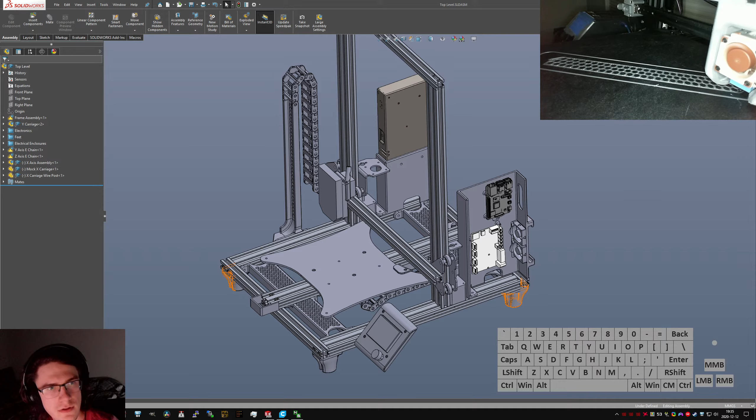Audio. Didn't check any of my levels. None of my levels work. Nope, that's not right. Hey, okay, no wait, we do have audio. All right, music. We got bobbing. My phones are up too much as usual. Okay.

I don't like having 3 bodies in one part, but it's kind of the only way to do it. So let's go back. Yeah, okay. I'm gonna have to control which body I apply these features to when I do it, because these fan features are kind of important. No, I need to go before the fan features so I can do the cutout for the fans, because otherwise it won't work at all.

So this is 5mm. So we're gonna do an extruded boss. Actually, hang on. This guy. Did I just tell it to be 5? I did. Okay, that's nuts. We're gonna do an extruded boss from this face. Then we're gonna take these 2 guys, and my audio is still too loud.

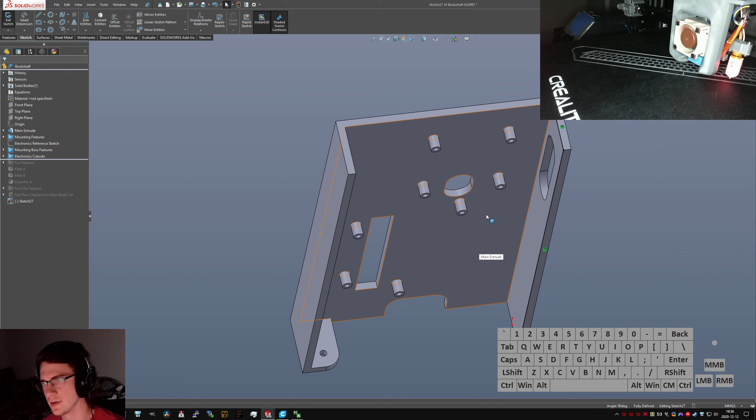So what I'm trying to do here is this sort of L shape back here is going to get extruded into a cover, and I'm going to make some interfacial features so that we've got a snap fit for this whole component that'll just push into place. It'll be a little interesting, I think, making the cutouts for the Pi, but I think one of my control sketches has enough detail there that I can do a rectangular cutout up top here when it's all modeled up. So got that in place.

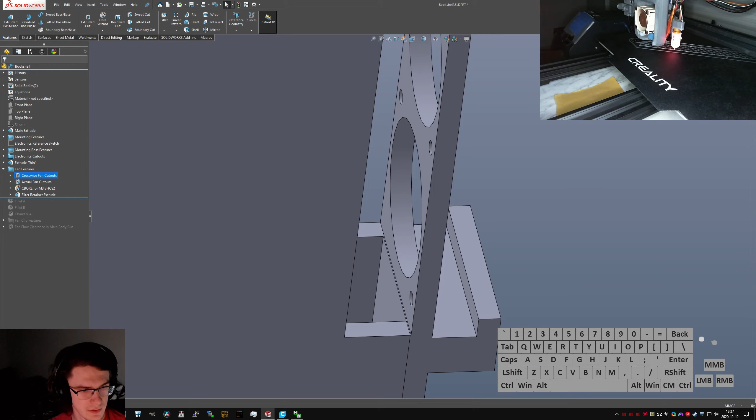Let's do up the body this way. I want 5mm thickness. Nope, it merged. Oops. Don't merge. Looks good to me. So now what I want to see, do the fan features correctly cut that out. Looks like they do not. So we got these crosswise fan cutouts. I'm gonna do through both parts, and that'll get me fan holes everywhere I need them. Which is right and good, I think.

So now I can come back up to here and extrude. Second chamfer on, move around a little bit, and it does work. 2 mils? Yes, okay. Here's a question. I think I do want to do like a 2 mil. Yeah, okay, so I need to come back up to, call this chamfer A. I think I call it the main extrude. I'm going to call it base chamfer A. We can call it base fillet A. Base fillet B.

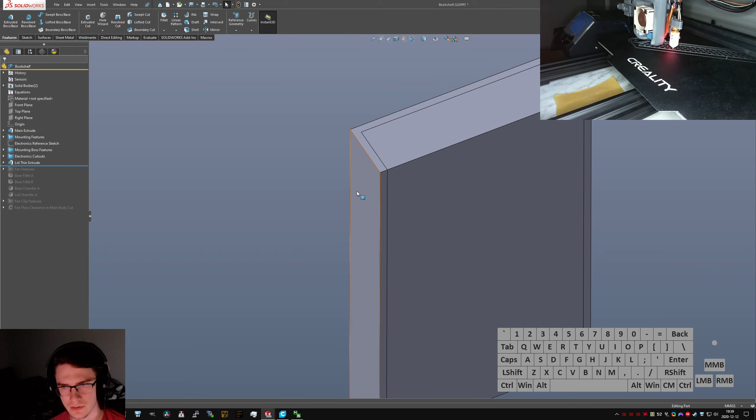And then I think I want this before the fan features. I want to have all my geometry in place up here. Oh, that didn't work. That was supposed to be a hide command. There we go, hide, okay. Oh, wait, I need a move face so I can get some clearance down here. Whoops, not a delete face. Why does it always do that? Deso, can you answer that question? I know you can't, but I can hope that maybe one day you might. Flip direction, pull myself back a little bit.

Question is, do I really want that clearance on all the other faces too? Think so? Yes, I think I want that clearance from all those faces. I gotta be clear on all those faces. So then when I come down here to fan features, now I need to do fillets. I think it's only these upper two corners. No, wait, it's this one down here too. So these will be the fillet A.

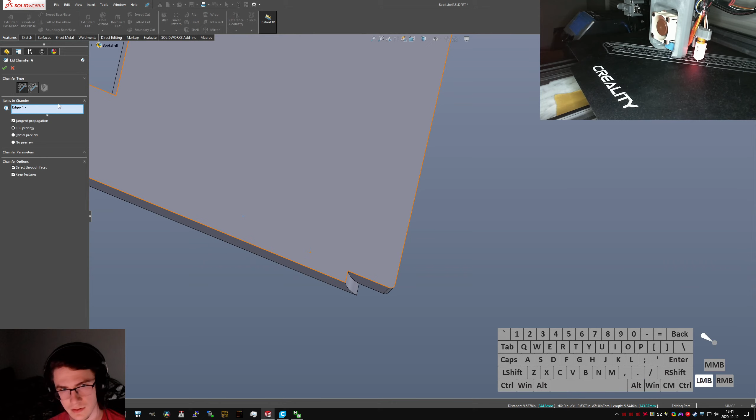And I need an extra bit of lid chamfer here. I don't know why that doesn't work. Not due to geometry conditions? What? It's like 5 mils thick though, that should be fine. Oh, hang on. Oh, that really gets rid of most of that, doesn't it? I think it's still useful to have a chamfer there, so we'll do select tangency in. That looks good, I think. Nice. Yeah, okay, that actually looks good.

This is a little weird. I think having that there is a bit odd, but I want to leave it because it looks good. And that is part of base fillet A, so we can check that in with lid fillet A, because it's all small stuff.

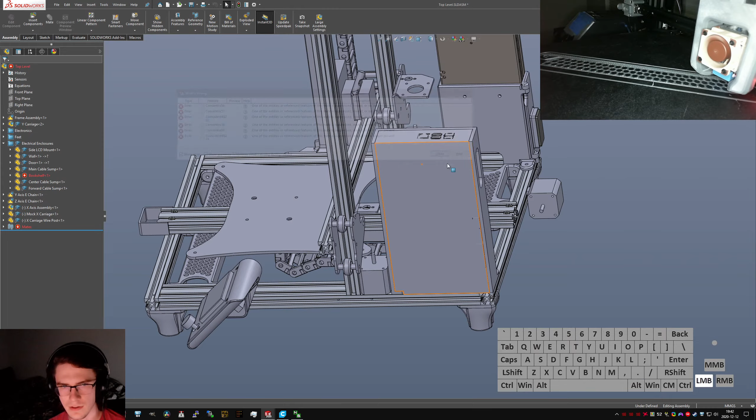Okay. That's the basics sort of knocked out. Call that lid base clearance or something. So now I need to decide, I think, so what I did the last time I had to do this was, nope, that's nothing useful. All my features are exploding, that's great. Made some top level. Oh, hang on, I'm in rollback. Nothing works when you're in rollback, turns out.

Okay, so now we should be missing cutouts up top of the Pi, which it looks like we are. And we've got all that down there that looks nice. That looks kind of janky, but that's fine. And that cutout is oversized. I forgot about that. Do I really want to extend the... Hang on, that was supposed to be pick this body and hide it. That, by the way, is a magnificent little tool for picking which layer you want to hide stuff. You can hide the whole assembly, the part, the body, you can hide the feature, which is weird. I would recommend avoiding that.

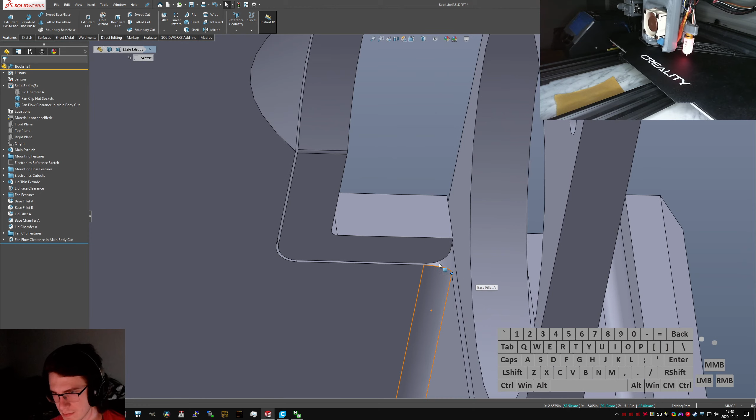Okay, so what I want to know is, we got 5mm clearance on the top, and then probably 2 and a bit. No, 3 and a bit. That's weird. Why did I do that? I'm gonna bump that clearance up a little bit. Let's come down into here. If you pick the face, it'll pick the feature in the feature tree. Or, that's not super useful.

Okay, crosswise fan cutouts. I think we were just a little bit short. How far apart are these guys supposed to be? Oh, it looks like I pretty much just winged it. That's kind of subpar. And I gave myself roughly 2 mils between them. Oh, I bet I did something stupid and made them symmetrical. That's the sort of dumb thing I'd do. Yep, I made them symmetrical.

Okay, so I need 95. So if I come over here and do 95, nothing should explode. It didn't. That's great. Oh, this is a stupid little thing. Fillet options, round corners, makes those look nice and reasonable. It doesn't actually matter because that fillet's so small you'll basically never notice. But why not do it the nice way?

Now the real question: fan clip features. Did I model this as a big chunky extrude? I did. Okay. So that gives me some options. I can stare at this in dismay,

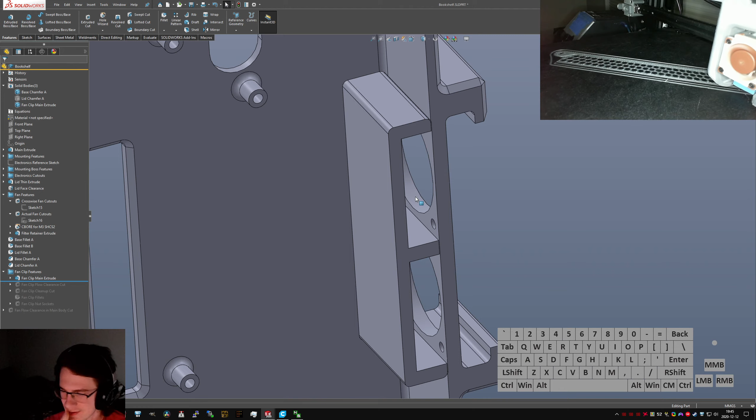which I'm kind of surprised it's not recognizing this as copyrighted music, because I'm pretty sure it is. Oh, I didn't put it in there. I'll just tweak the volume knob a little bit. This is Bobbing. They are one of the two or three musical projects that fell out of Feed Me Jack, which is another excellent band. Oh my god, they're so good. And one of the members became Still Woozy. Nobody will ever watch this. They're great, listen to them.

Okay. Do I want to trim it down to just that? Or do I want to... I think those end up being captive nut holes, right? They don't, actually. Oh, no, there we go. Fan clip nut sockets there at the end. Did I pattern them? No, that's kind of lazy. What I should have done is, if you're more careful, you can have a setup sketch that makes it very easy to pattern things later on. So I think we're going to rethink this cleanup cut.

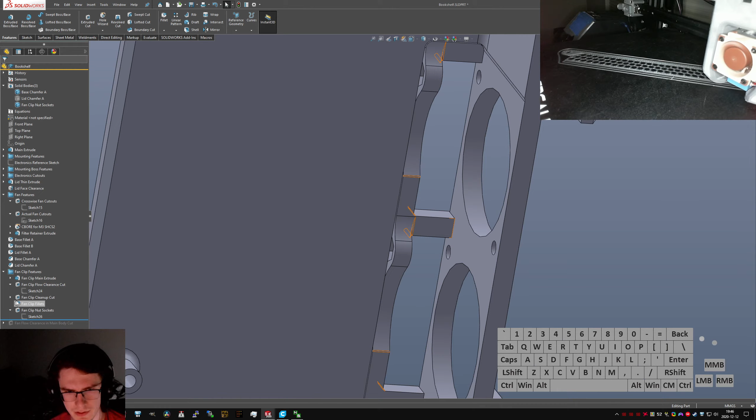It looks like that doesn't end up cutting too slim on the bottom there, so when I come up to this clearance cut and say come from the left edge and then hide my big assembly, then I get to think about how to pattern this. Did I already have the fan holes cut at that point? I did have the fan cutouts. Okay, sick. That makes this a lot easier. This is gonna be kind of wacky. And it looks like there's some fillets on here that I don't remember including.

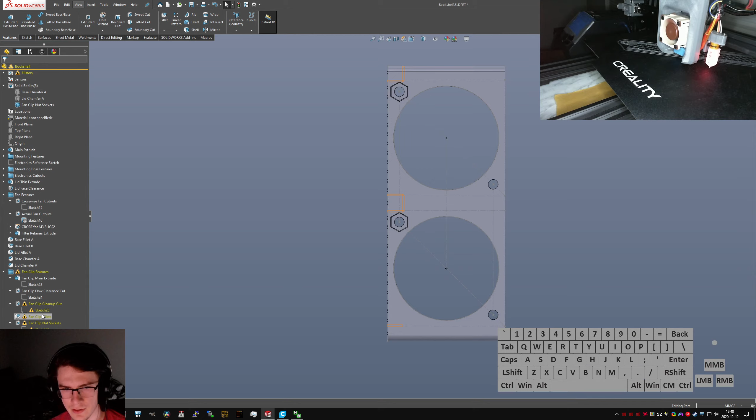Okay, I'm gonna get rid of that line, and rather than relying on that sketch, I'm just gonna draw a whole rectangle around it. And then I can just go to these guys and say, blink. Now they're all the same, they're all good to go, they're all tied to that sketch, and then a whole bunch of stuff down the line breaks.

I think I can actually get rid... Can I get rid of that? Yeah, I think I can get rid of that feature entirely. So that fan clip cleanup cut there should only get rid of the fillets, which is fine. I can fix that. Actually, what if I told it to not delete? I don't want it to delete the sub features, but I don't think I really have a way around that.

It would have been nice to keep where those fillets were going, but now I think it is better to have just the reminder and context for everything. Oh, no, okay, I did have the face offset in there. I couldn't remember when I did the clearance in there.

Okay, we got some stuff that no longer exists. What is it coincident with? I don't know what it's coincident with. That's weird. So let's... I don't know why it's, let's do coincident there. Sick, okay. Make a sketch.

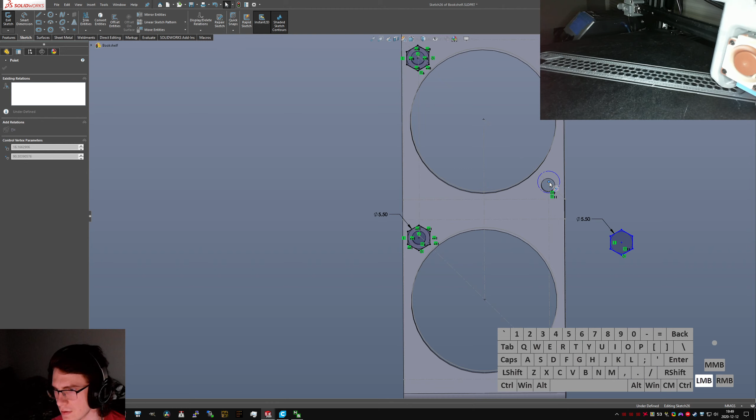And then I'm going to edit sketch, do Control A, Control C, Control V, like a lazy person would. And none of the relations copied. So, pattern driven, is that even a thing? No, you can't do a pattern driven sketch. But it looks like it doesn't really copy any of the relations, which is really rude. It doesn't do me any favors.

So we're gonna go and do the same trick again. Copy all of my circles and hit Q and make them equal. And just pick an edge, orient it the way you like. I'm sure there's a better way to do that programmatically so that they're all linked together. Like maybe you could make one parallel if you wanted to tweak them later, but these ones, I don't want this rotated 60 degrees because then it would put this point towards here, and that's a weakness issue.

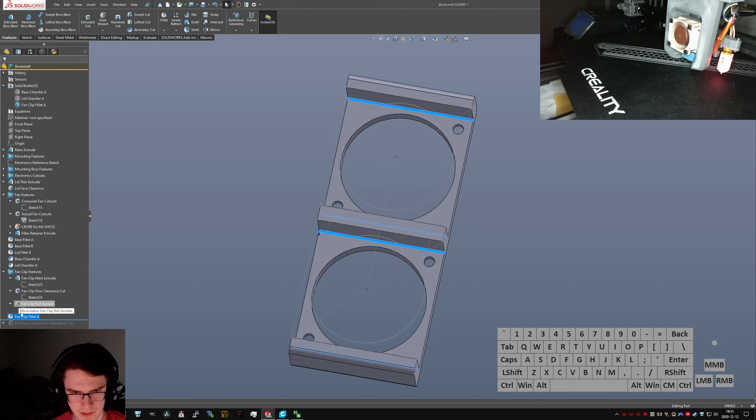So, fillets. Let's do fillets. I'll do fillets last. So, I'm okay with leaving them at the end. I think I had them before the fan clip nut sockets for some reason, but that's not really best practice. So we'll get these concave ones. 0.6 is right. So, fan clip, fillet A. We'll make sure that it's beneath one of these so that when you close the folder up, it disappears all nice and dandy.

So here's the sketch. Get that sketch. Alright. So that looks good now. Let's come back and look at it in context. This thing, I used to hate this dropdown because I thought, why would anyone ever use it? But it turns out it is fantastic for this sort of thing where you're doing multi-body parts and you need to hide things quickly to get a good idea of the context. But that looks good, actually.

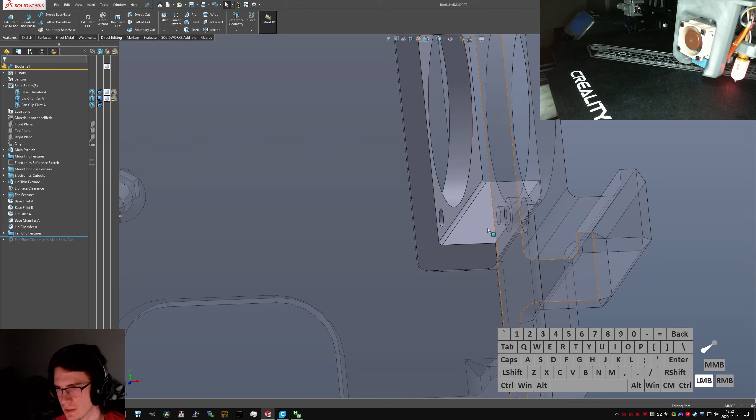I think originally I was planning on just leaving the nut open on the face of the fan there, which is fine, I guess, but it's not great. Whoops. I want to see to that face. We still got 20 millimeters, which is perfect. We're gonna have like no interference issues, I think. Yeah, it's fine. It's fine. I'm just gonna not worry about it and hope it doesn't blow up in my face. So let's turn those off.

Oh, hey, we're on to the next album, it's called Mixtape from Bobbing. Also excellent. Great choice. I think what I'm gonna do is I'm gonna add my Feed Me Jack playlist on the end of this, because it is good.

Did I fillet the inside of that? I did. Okay. That looks a little weird out there, but it's fine. So, fan flow clearance in main body. Yes. Okay. It looks like I'm just stealing off that sketch. And it looks like what it's doing is it hasn't selected the other body. So if I just tack that on there, we should get two nice little cutouts in the side of this lid structure.

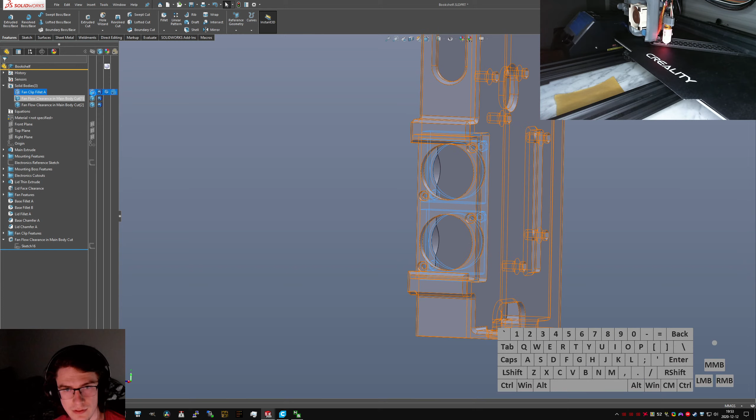I can hide that. Whoops. That hide it? Yes, okay, that does hide it. So we'll hide, yeah, we get two nice little fan flow cutouts. Not really necessary, but a nice touch.

Lid features, various fillets. Seems all right. That's most of the things I wanted for that, I think. And I don't think we're gonna have issues.

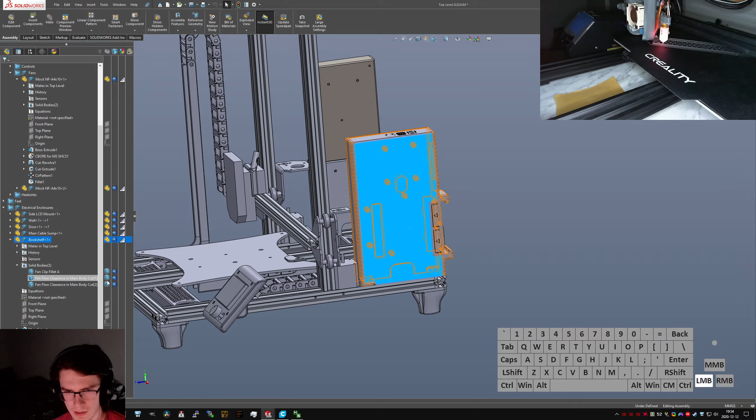Let's come over to the main body here. Hide the mates, those are always rude, kind of hard to deal with. But this guy we can. Oh, we do want to pop that out actually, I do need to pop out bodies. Let's hide lids, or no, wait, yeah. Let's hide the base, and then we can come back here and say that's Garbo. That won't work, or it's fine. That will work.

It's gonna be kind of tight, I think, from the top of the PCB to the inside of the face is about 3/4 of an inch. Is that what that is? 17.4 millimeters in inches, okay, 2/3 of an inch roughly. That's not great.

It looks like we still have a little bit of recess in this. What's the maximum distance here? That's center to center. Oh, hang on, I have these now.

One of the early issues with drawing this part was that I didn't actually have those heat... oh, they're already on my desk. What am I doing? I didn't have those heat sinks that are right there, that'll be cooling the backside of the stepper drivers. Now I do. So, calipers.

A bit of my stream prep work list: remember to grab calipers because you're going to measure stuff a lot.

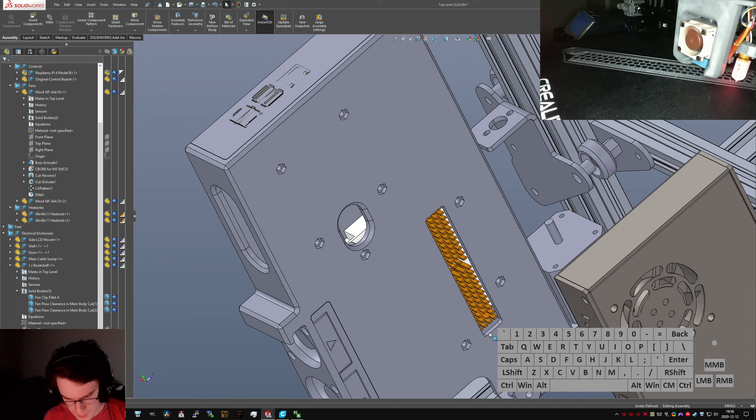Okay, so it looks like, well, let's get a baseline first. What did I think this distance between here and all the stuff that's in my way is going to be? That is 13.65, 4 fins wide. This is about 15 millimeters, so I'm definitely going to want to go narrower, actually. It's 11 millimeters across for this one, so what I'm going to do is come over here.

Oh, hang on, why is this untrimmed? Oh, hang on, I got these named backwards. ASDF. Trimmed, untrimmed. Let's go back to trimmed. And we're going to change this last trimming feature from being coincident up there to making it coincident with that guy right there with an Alt-D.

Oh actually, is it? Oh yeah, I forgot I configured it to have a little bit of a delay. I should see if I can, I'm gonna bump that up to like half a second, so it's easier to see how my hands work. So now we can come back to this, and fingers crossed nothing broke.

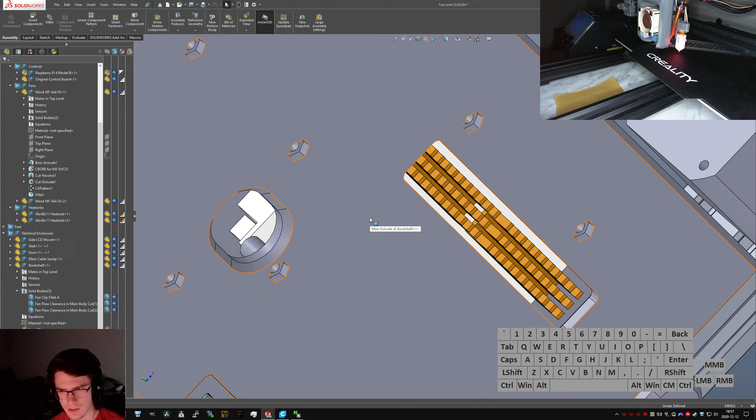Yep, because I was referencing those faces, which is made by the feature, so it all came out nice. Those will cool that really well. Then I was gonna forget what I'm doing, accidentally hit a body. That's me hiding bodies.

Let's, okay, get those two faces. I want to get the minimum distance. Okay, minimum distance, please. Oops. I told you minimum distance. Oh, I clicked center to center. I'm dumb. 3 mils. So what I'm going to do is go back and shorten those posts

in there so that we can get just a little more wiring clearance. I think right now we've got 9 millimeters. That'll be stubbying it up quite a bit, but I think that's probably fine just because, oh hang on. 9, let's go to 6. Ooh, sneezy.

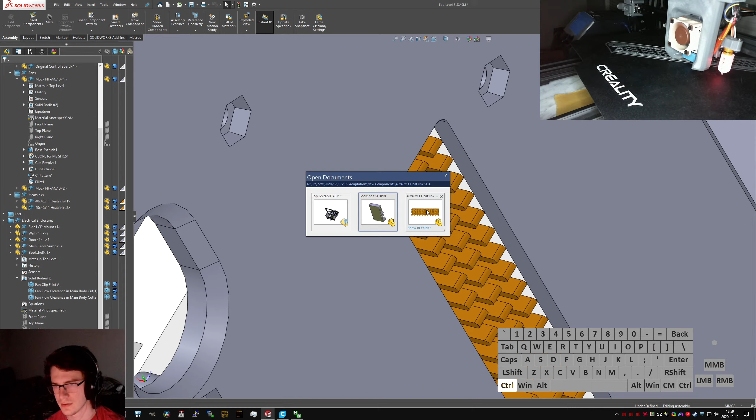So that'll stubby things up a little bit, which brings those right out to... oh, hang on, I don't actually know that that's the true height of those. I don't know, I haven't measured how tall these fins are. They say 11 mils? Let's just go up in the part and double check that. Yeah, okay, 11 mils, so that is dimensionally close enough.

Oh, I can also check if they're close enough fin-wise as well. They were 1.1 millimeters wide, roughly. And those from the cut... oh, hang on, I want the distance between them rather than that. Actually, did I go? Yeah, I want the distance in between these, is much closer to 1.8. That doesn't seem right.

What's it look like on the untrimmed one? Well, actually, it seems pretty okay. Well no, actually, these fins are just skinnier, so I'm gonna widen that up a little bit. They look a little less substantial, but well, not like there's anything I can do about it. So, and that does give me a little more space in the wiring. I'm looking good there.

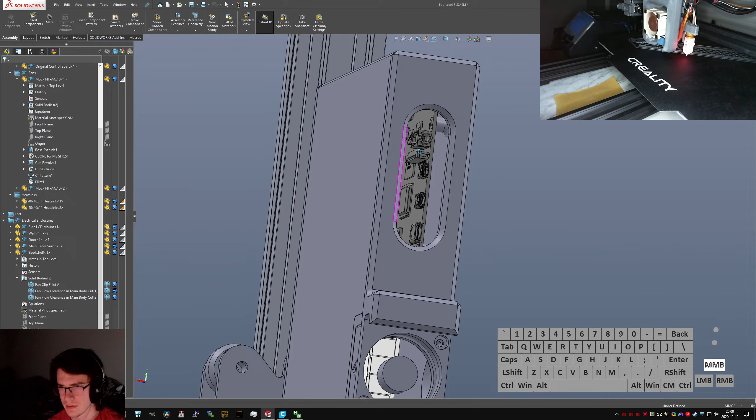Oh, I need to make that cutout. So we'll come back up into the lid features, right after them, under the reference sketch, show it, and then we'll do, let's see, I want to come after the face clearance so I don't have to select two faces up there, which I think is good. So we'll do a quick extruded cut.

That looks pretty reasonable. Whoops. Is Pierce gonna work? Nope, it won't. Okay, so I do have to select the points here. Give me the point, please. Thank you.

So now all we have to do is say this is 20 mils tall. Then we can just say up to next. And we'll cut a nice big cutout for the Raspberry Pi.

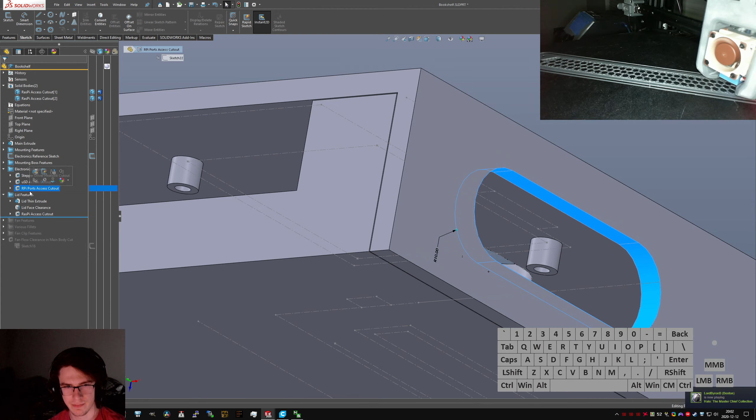Raspberry Pi access cutout. Oh, this will actually be the second Raspberry Pi access cutout, because I have two different Raspberry Pi access cutouts. I'll call this one upper and the other one lower.

Ooh, no, hang on, I should move all these features up here. And then I should move... hang on. Oh wait, I moved it into that. I want to go below. We can move this guy.

Raspberry Pi side access cutout. And the top access cutout. So then when that gets all closed up, it all looks nice and tidy.

So now we can go back down to fillets. And this has thrown a fit. Why is this thrown a fit? Oh, hang on. Oh. What? Okay, so we've wiped a feature here somehow. Lid features.

Oh, this is a good song.

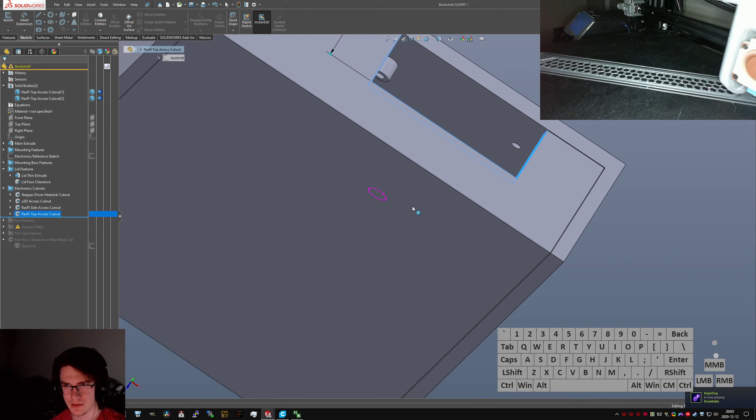Mastodon, Matador. Okay, electronics cutouts, side access. I think this top cutout may have wiped it. No, that doesn't make any sense though, because mounting boss features, mounting boss pattern.

Oh, God, I gotta hide that body because I can't see what's going on. Whoops, wrong body. Okay, the top access cutout does delete that for some reason. There's just no reason for it to do that.

So we will take the base out of the equation there. Base, lid, and unhide everything, and then we can come back down. Yes, okay, now we no longer wipe a feature off the Earth randomly.

I'm surprised I only got rid of one of those and not both of them, because it should have. They should be symmetric, but... oh hey, look, we still don't have enough height. Who would have guessed?

I think I am just going to leave it. I'm just going to make it clear the top, rather than... let's see, you got 23.8 millimeters, so we'll go to 24.

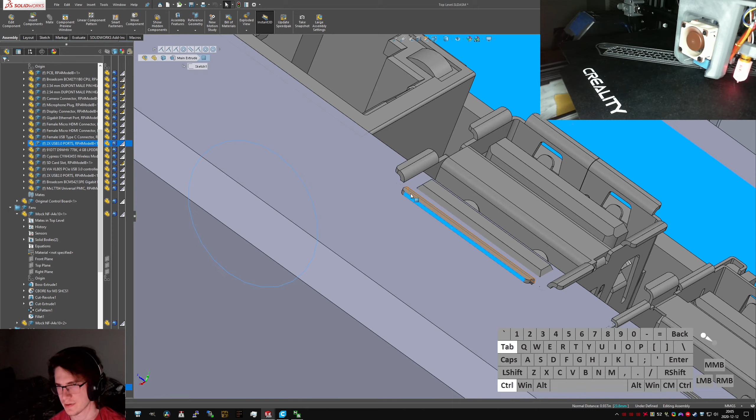I'm going to leave it as just sort of a big open cutout there rather than having a bit across the top, because that would mean that when I print this, it would have to have a whole bunch of stuff in here. It would have to have support material. And that's just kind of a recipe for garbage.

Seems pretty okay. And then we're gonna do a quick... did I make that accessible on both sides? No, I didn't. Okay, that's fine then. Worth being consistent.

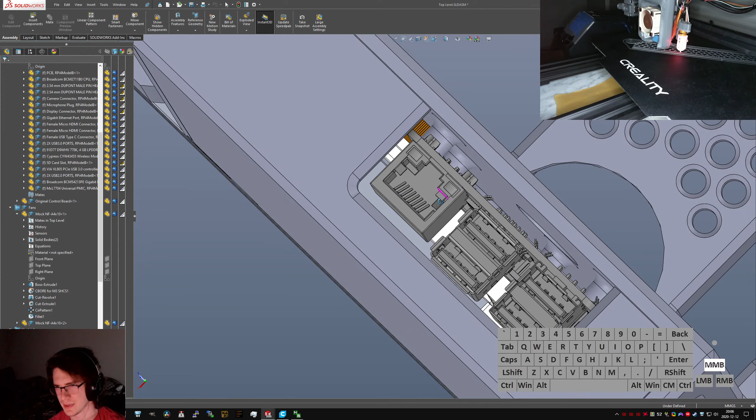That looks pretty good. And you're not putting any stress on the lid, you're only putting stress on these mounting bosses, which will be printed horizontally so they're not going to fall apart, which will be nice.

Almost makes me want to do a little bit of a cut on the top so that I know they'll print well, but I don't really need it. I guess it'd be a cut on the bottom rather, so you have a nice big flat surface, but it's not really necessary.

But that looks pretty good. And having these two fans in here should be all good for our cooling requirements. If not, then I'll just do the same thing I did down here and cut a little port out over top of the MCU. And that should be enough.

Obviously, it'd be nice to do a whole sort of quick-change dealio, like what's in here, but it's not super necessary, because it'll be on the lid. Oh, you know what, I couldn't do that up there. Well, I could, it would still hinge down into place, but it'd be messy.

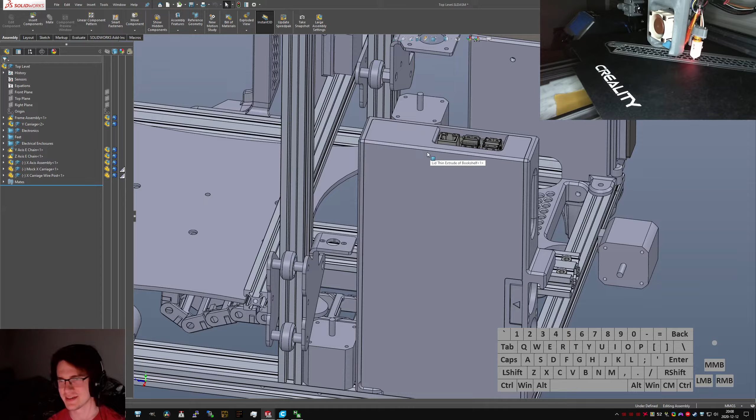Too Tall Toby's doing the student question videos now. Just kind of nice, I'm glad to see him. I'm glad to see him replicating what I did. Although maybe he did it first—I haven't gone back to the annals of his channel, rather.

So I guess that leaves attachment features. So we gotta go back to the bookshelf, and I'm gonna do these. I kind of need to know where the electronics cutouts are, though. So we need to come down to fan cutouts and everything, but before fillets. So.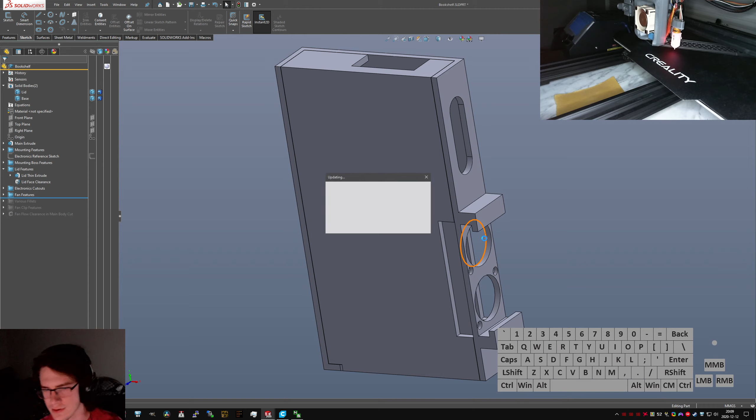I'm gonna need to go look at the other. Turn it down a little bit.

So there's a way that I did it over on this part. Isn't that a parent? Parent is itself, that's great. What's it called? Power supply solid part. PSU solid part, what's it called? Enclosure V2, there we go.

Okay, so door snap features, let's go look at those guys. So I got the mirror plane, don't know why I added that. Oh, because I was trying to mirror a bunch. I only did 2 snaps.

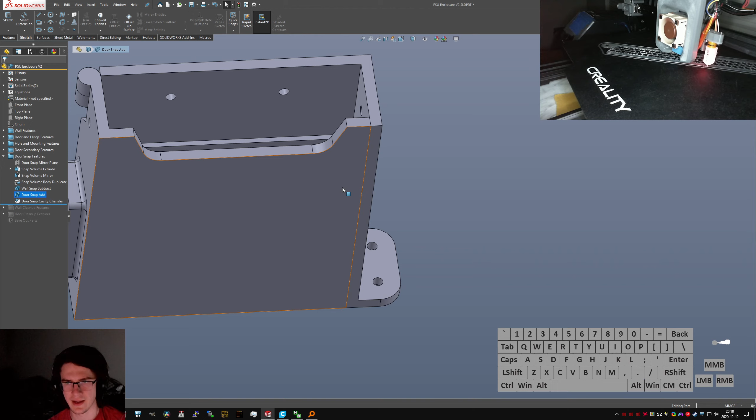Okay, so I had that extruded volume, then I mirrored it downward. I duplicated the body, subtracted it from the cavity, and added it to the exterior. And then I added a chamfer on the inside. Is that right? Yeah, that sounds right.

So now we go into the bookshelf. Hide everything, make everything transparent. And this one is going to be a whole bunch of separate individual extrudes, which is going to be kind of crap, but there's not much I can do about that.

So when I did it over here, what plane did I do this from? Oh, I did it from up here. Okay. So I can control my snaps.

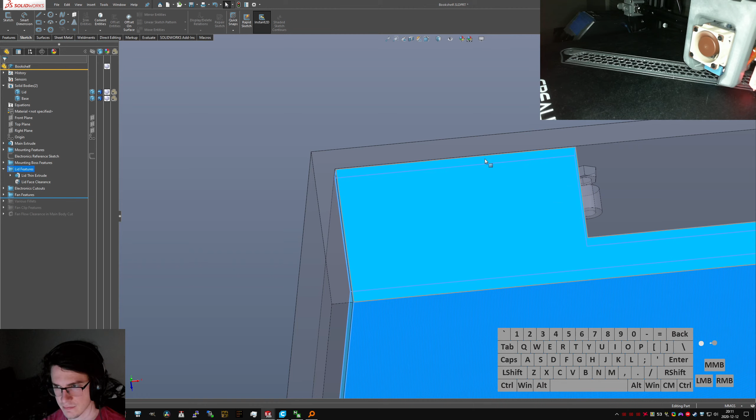35.5 is 17.75 at the midpoint, so I'm gonna come down here. Oh hang on, I made that - I don't need to do those face offsets there, at least on those outer faces. I think I might want to keep this upper face offset just so that it plays nice, but...

Whoops, let's get - oh hang on, it's because I've got this in the way. Hide the base. I don't want to offset these faces for clearance because I need them to attach the... oh! Hang on, no, I do want those, I do want those there. This is... I'm a clever boy.

So we're past the fan features now. You can see everything, we have all the cutouts we need in place to design our snap fit features.

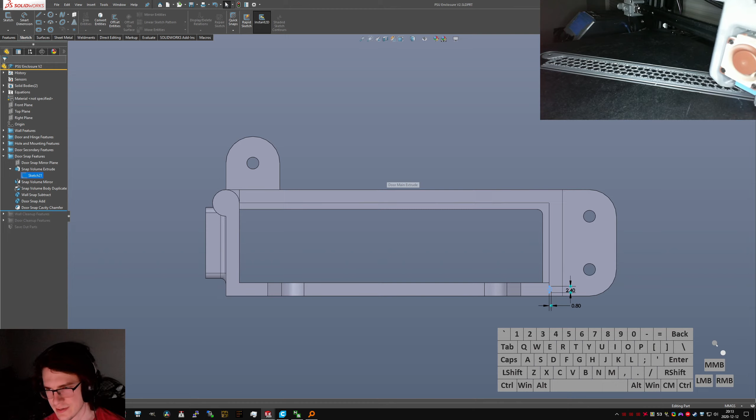And now I gotta keep checking back to this thing because I want to make sure that I did it right. Okay, 2.4 and 0.8, so that's what I'll use.

I can do 2 points, vertical. Nope, I'm gonna have to add a construction line in here, I think. That's a 0.8.

And these 2 dimensions should be enough to constrain the diameter. And then I just make those 2 lines collinear. Oops. And I'm gonna add a... there we go. Okay, so now we have a sketch that I can use to start drawing the cavities, or rather the bodies that will become the cavities.

So we don't want to merge result. I'm gonna offset by 17.75. I have been right.

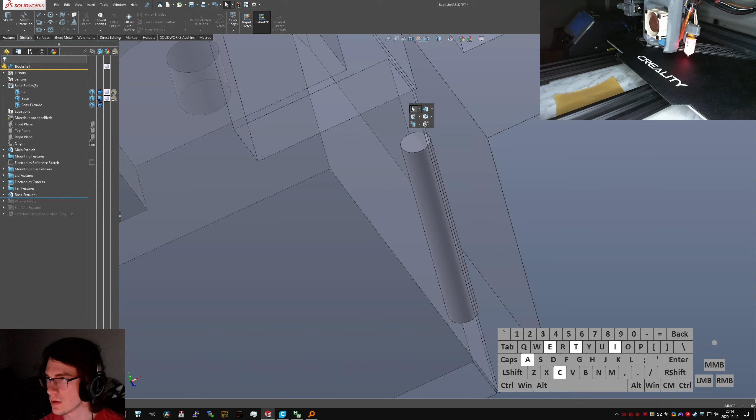Yes, okay. And I don't want to do the duplications and the cutouts until I've modeled all of my snaps.

I think I'm comfortable with putting a snap there. So we're going to do another extrude. Put this top plane up here. And then I'm going to show this guy - I'm just going to convert the entity. That's fine, it's not a crime. It saves time, it kind of rhymes.

Let's just do an offset of 50 to start, and then a blind of 40. Seems alright - no, that wants to be a mid-plane. I got the offset wrong too. 60 mils? 55 mils, that's pretty close to center. That'll be a good snap fit too.

Do not merge result. There's another one of our interference bodies.

This song is so good. Move Your Still by Feed Me Jack. That's a band I miss.

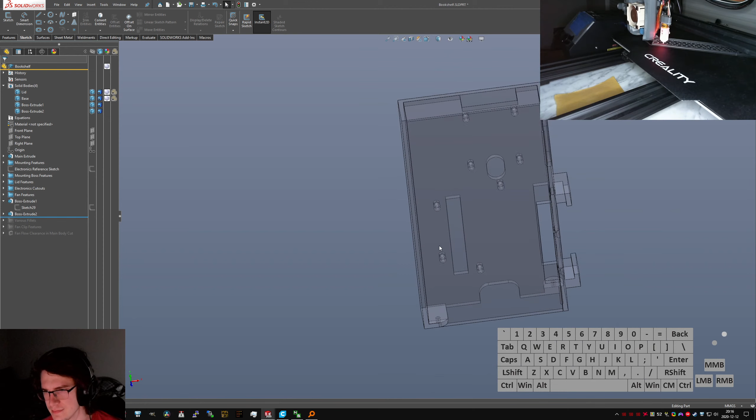I'm still in this body. It's just so good, the front face. I want one up here, as unorthodox as that is.

Whoops, actually let's not do the constraint between the points, let's do the constraint on the line. We'll call it 0.8. And this guy wanted to be 2.4, I think, was what I had it on the other one. Then make it collinear.

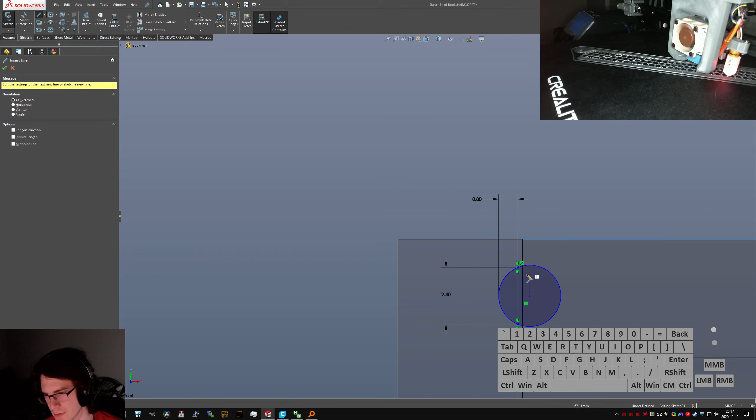Can't select that edge, it won't let me do that nicely. So if I do this, select midpoint. Oh hang on, oh it'll only let me draw the plane. How rude.

I'm gonna do this the real greasy way. So we're at click, 2 points, coincident. Horizontal construction, nice. Now this should be 40 mils across, so I'm gonna go 17.5, sound alright?

0.5, first direction, mid-plane, 20, yeah, sick as. Don't merge.

Almost done actually, this took less time than I thought - or is taking less time than I thought. Oh, you know what, I should offset it by... hang on, we're going to offset this by 20, so it's in the middle of kind of this side region. There's no real reason to do that, but it makes me feel nice.

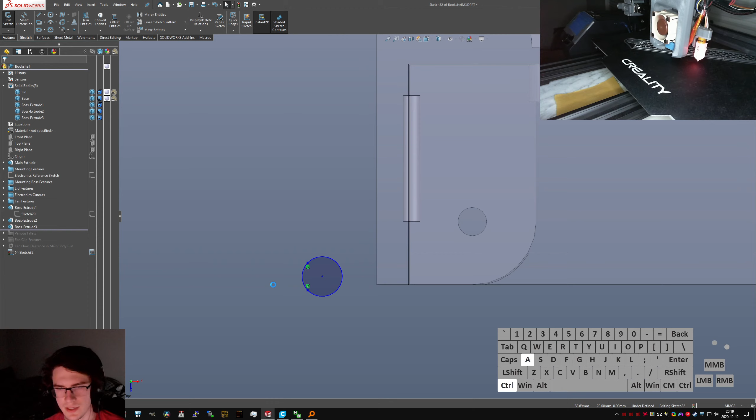And now, for my final trick. Same deal, 2 points - actually, do I need to include the 2 points? Draw a circle. Don't - that is interesting. Alright, well, there's a whole bunch of useless points in my sketches now.

And I don't want any extraneous constraints. Okay, just from the middle of that guy, then we pick that point we want up there. I don't want the edge, I just want the point.

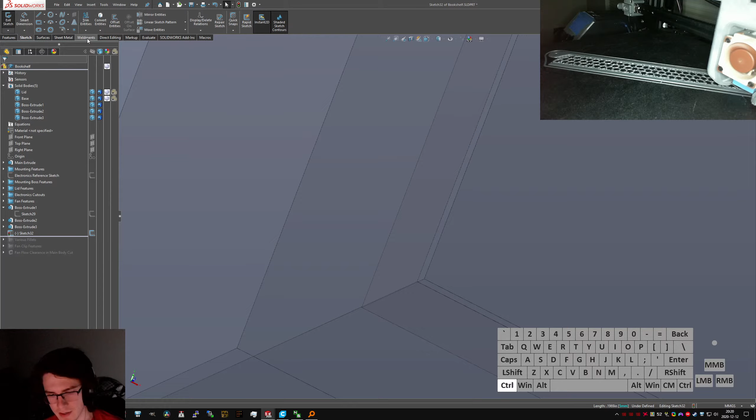Hang on. No, I really should just convert the edge, save myself the trouble. Convert entities, come up top. Wipe it. Select this guy and this guy. Midpoint. Easy peasy. Construction, horizontal, done.

You really should convert edges if you're using them. In fact, it's kind of naughty of me not to. So we should be 250 millimeters tall, so I'm going to come down like 150 odd. It's probably alright.

This guy's going to be kind of big. We'll do like 50 mils. And I accidentally merged it. Whoops. Do not merge.

Okay, so we got the lid and the base. Got our 4 contact points, which is probably more than we need, but I don't know. It seems, I think, more the merrier in this situation.

So, duplicate, copy, yeah, move copy bodies. So we're gonna pick these last 6 guys here. We're gonna copy them without moving them.

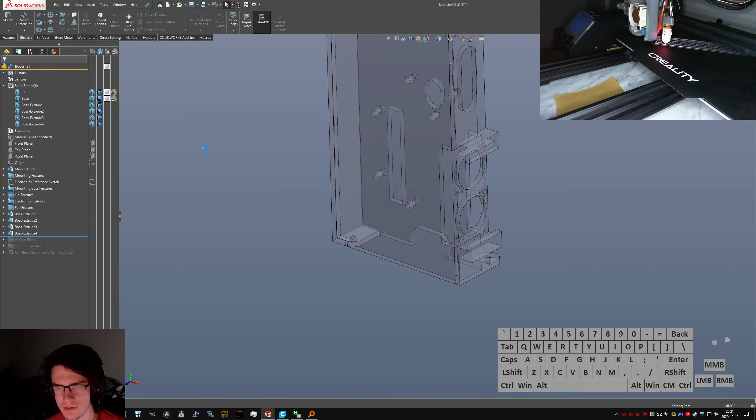If it lets me pick that last one. Hang on, where's that one? Do a quick rebuild here. It seems like it doesn't want me to pick that last one. Oh, it's got transparency applied to it for some reason.

Weird. I think it was left in a funky state when I unmerged it, and it just, the body hadn't gotten around to doing what I want it to do yet.

So now I should be able to do bodies 1, 2, 3, 4. Okay, copy, don't move. Get the message. No, it didn't ask me about that. That's weird.

I think I used - well, we can go check actually - which ones I used for the subtract. Well, interior fillets. Yeah, I used the duplicates for the subtract.

So we will subtract - no, it is combine. That's the feature. We're going to subtract from this guy, for ourselves, those 4 copy bodies. And we will combine with this as the main body.

Base. What? Something's already called base. Base body then. Fine. Lid body.

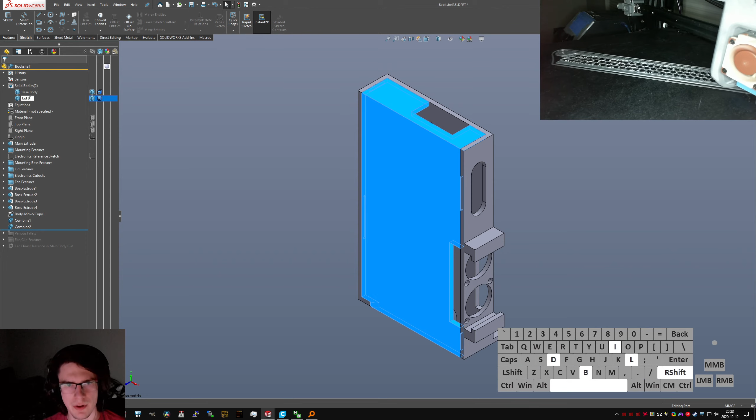Now when I come down to various clips and fillets and whatnots, nothing should complain. Hang on. Expand all. Just gonna have to go through and expand everything. One of these has transparency applied to it. Oh, it's the body.

I'll get you. Okay, so these are going to be the snap bodies. This will be the snap body duplication. Duplicate. Snap body duplicates. Snap cutouts. And snap extrudes. Safe enough. Extruded bodies. Let's call it that. Snap cutout combine. Snap extrude combine. We can call this the snap features.

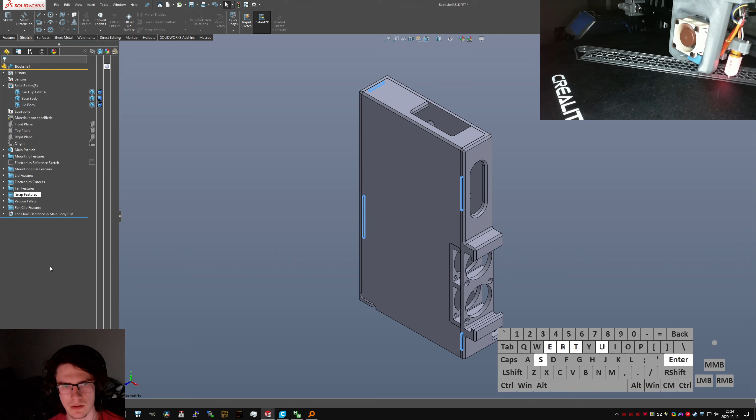Such a good album. Okay, shrink that up. Got clearance on all our parts that we care about.

Let's pick this body, change transparency. Oops, where am I looking? I'm looking over here.

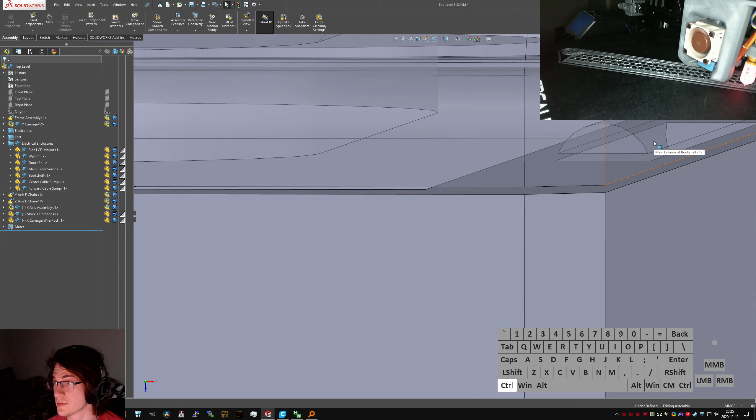Hang on. Oh, those subtracted. Whoops, glad I caught that. Oh man, yeah, that should have been an extrude, not a cutout, because that's just a whole bunch of negative space. So snap features, we'll change this to lid snap features.

Add, there we go. I'm able to create a single body that's - oh, didn't include the lid in that. Lid body. Fan clip fillet A. Fan clip body.

Come up here from the top. We got these little niblets hanging out, which is perfect. The last thing I need to do is hide the lids.

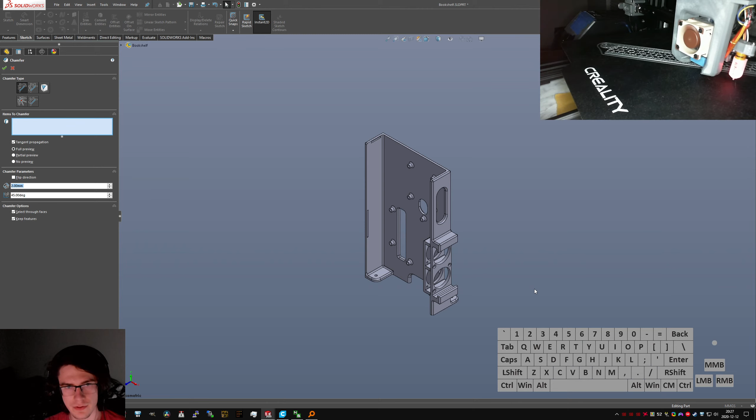Come in there with a chamfer tool, like a 5mm chamfer, so I get lots of clearance. That's actually way too big. Let's do like 3mm.

That's still 3mm, that's still not huge. Oh yeah, I guess it is only 0.8, so if I do like 2mm, that'll be just fine. It's still all 45, so that's fine.

Okay, so now if we come over and look at top level, the lid body will be hidden because I just hid it. Smart. But if I make the base body transparent, you come in here and see that we've got these nice little shells around all of our snap lids, or all of our lid snaps.

Just perfect, this is probably good enough to print now, I think. I can't really think of any other features that I want to add. This guy in here, these transparencies, 14.5mm, which is going to be plenty of space.

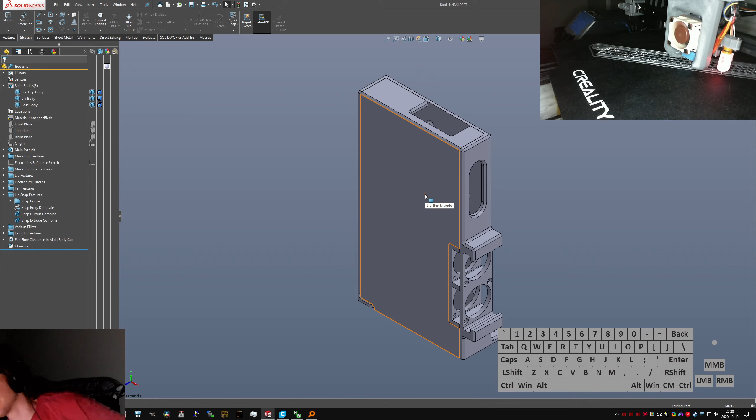Just with certainty, and yeah, that's looking good. It'll be all solid, can't poke your hands in there and electrocute yourself. Not like you could, but it's only 12 volts. There's really not enough power there. It'll spark, but it's not going to do anything dumb.

Okay. I don't think there's anything else really to add to this one. Man, these parts are all really all good to go. Maybe I want to add a little chamfer in there, just to make it, well, that's borderline making it difficult to print the part. We're already gonna have enough of that with this whole silly overhang business. And this tab being back here.

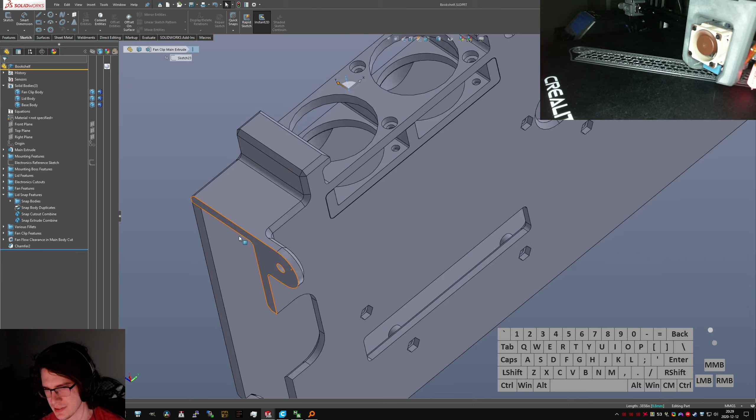You know, I could move that to the inside, and I could print this whole thing on its back. Let's take a look at that, actually. So, features I've got, if I move that to the inside, then I print this whole thing on its backside. Yeah, actually, that would be sick as heck. That would make this a lot easier to print. Would it fit on my bed, though? That is 248. Yeah, it would totally fit. Okay. I don't think I could print the lid at the same time. And maybe I'd even want to print the lid on its side.

Yeah, let's move that tab inside. Ooh, wait, no, that's gonna interfere if I... Oh no, it won't. I could just have it be in this corner here, and that's fine. Yeah. Oh, I can go and show you, actually, because it's one of the things I covered. There's no feature in here that means I can't move this little boss, mounting boss, inside there. And that's good.

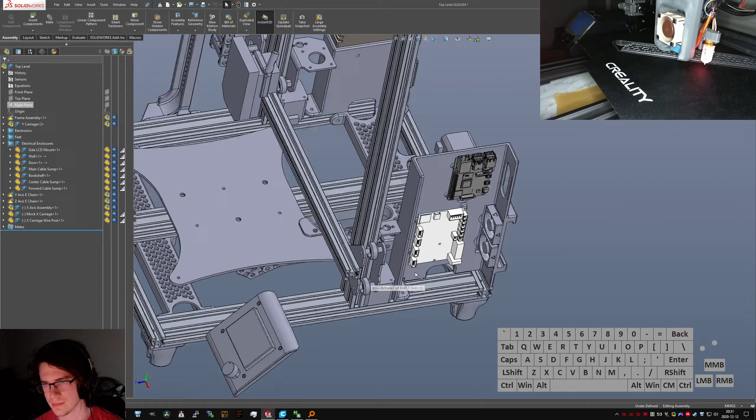I was a little averse at first to having fasteners be inside electrical enclosures because you don't want any conduction outside. I'm trying to keep it all isolated inside the box, except to other parts of the chassis. I probably should bond it. I should wire or ground bond the chassis at some point. That would be a good idea. Okay, this is going to be messy though because I have to go way back to the start to do this.

No, show it to me. Okay, this is gonna get weird. Well, that's guaranteed. Oh, hang on, that's still vertical. Whoop. This is all sorts of weird. Let's do that guy. Horizontal. Vertical. Oh, I just did 20 mils tangent on the inside, I guess. Interesting. I wonder why I did that. But now we can come in here and make these all collinear, make this all play nice. Collinear. Let's just put it as tangent and see where that puts us.

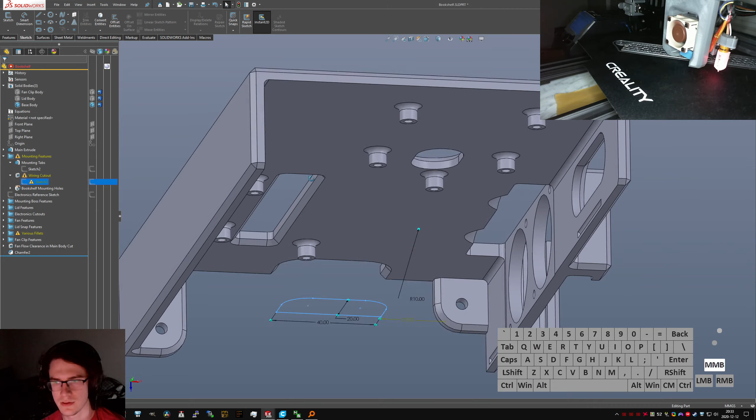So first thing, wiring cutout throws a fit. I really should have tied this to the outside the first time, because it's a distance back from the back of the chassis. So we got the wiring cutout. Why is it still throwing a fit? Through all. Shouldn't be throwing a fit, but it is. I just rebuild. Yep, okay. And then it just stops complaining. Perfect.

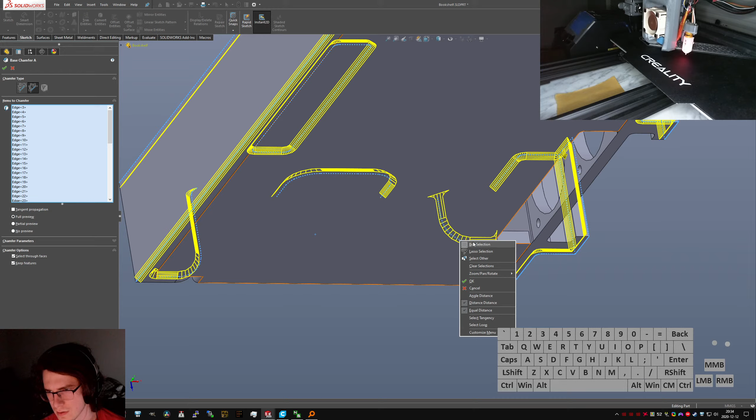So now I need to go in and clear out all of the no longer present missing base fillets. Come in here and add those. And these guys down here. And then the chamfers. We're going to be missing some edges. So if I select tangency down here, perfect. Looks like it was always there. And because I modeled right and I put all my features in the right order, it was very easy to reorient that, so I'm pretty pleased with that.

I just realized that's not going to be on center line. Hang on. So if we come back to this guy, I think I mounted this with exterior faces, so I don't have to worry about edges, but that's clearly not going to fly. That won't work. I need to come up to the mounting tabs. I need to have this be not like that, but coming down to this face. We'll do 10 mils. That's a little tight. I suppose I could just extrude it out this way if I wanted to.

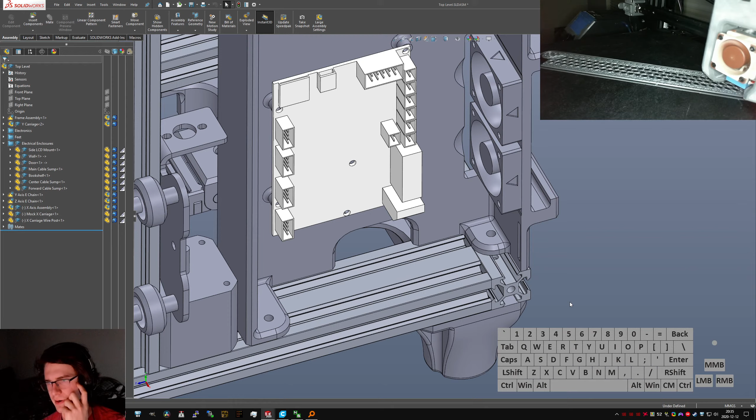Do we have the clearance for that? Like, is there anything in the way? Well, I kind of want to keep it away from these power connectors, for the reasons I mentioned earlier. Better not to have conductive things near power wires, unless it's like the whole chassis bonding towards ground. So what's the center to center distance? Is 5 mils. M4 washer dimensions. 9 mils. That's going to be a little tight. So I'm going to add a washer clearance feature there. Oh, hang on, no, it's after the fillet. Nuts.

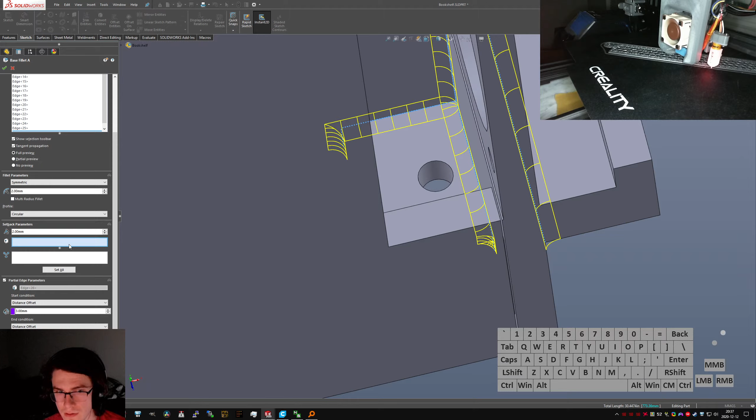Okay, fillets. Let's see if I can add like a keep away feature. Setback parameters. Setback vertices. Setback distances. Partial edge parameters. Let's turn this on. I've never used the partial edge parameters before, so let's learn. Distance offset. Let's do 3 mils. Oh hey, that's what that does. Setback sets back from there. Set all. Oh, partial edge parameters. That's what it's doing.

So it won't let me offset from that edge. And I do really have to keep away from that if I want to have that fit right. So instead of tweaking that fillet feature, I'm going to come into the... Oh, hang on, that's part of this that snaps. Snap cutout, chamfer. I do really want that clearance there, so I'm going to...

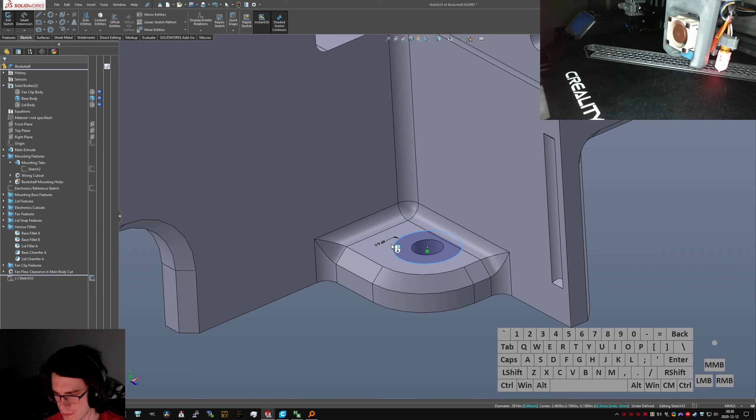We'll just do an extruded cut on this face right here. .5 mils is plenty. We'll do blind .5 mils. Doesn't need to be anything considerable, just need a little cutout right there. Then this will be mounting tab washer, but cut out. We'll get a nice little cutout right there, just exactly where we want it, nowhere else.

And now we can put the whole thing on its backside, which saves me a ton of time and a little bit of material, and it's going to make this whole thing way stronger. I think it does mean that these little bosses here are going to be in shear now, which isn't great, but it's not that big a deal because I'm not going to be facing huge stresses anyway. And on top of that, they'll be under compression, so it'll be really hard to break them because there'll be bolts through them. I don't even know why I was worried about that.

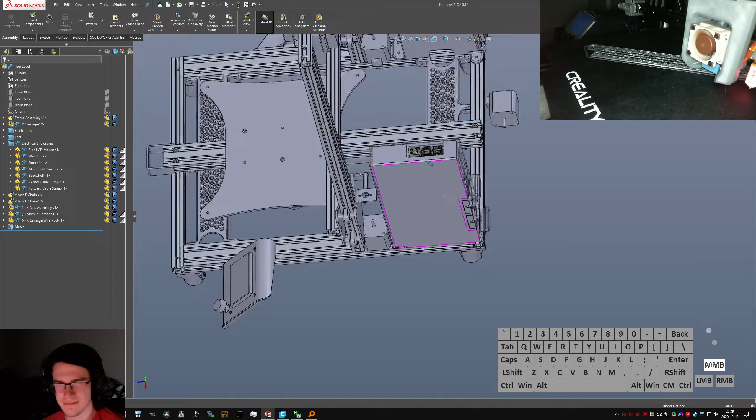Dead in the water. So we can come back to that. Transparent the base again. It is a little skeevy because it means that the whole thing's a little bit wobbly on the back there, but I'm not really worried about it because as long as I'm not pushing on it, it's not going to fall over. It doesn't have huge loads on it. It's not heavy. Yeah, that looks great. I wish I'd thought to do that over here, honestly, but having mains voltage right next to a fastener, just, no, not a good idea.

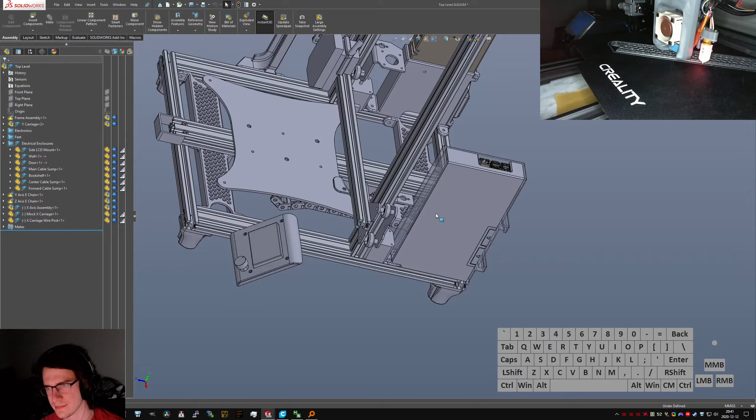That just looks great. I'm really pleased with how that looks. It's funny that I didn't include the clearance over here. I definitely should have in hindsight. But the move face trick for making sure that you've got clearance with all your contacting 3D printed parts is only something that I started doing recently. Ugh. That really looks great. I'm really pleased with that. I know I've said that a few times now, but I really, really am.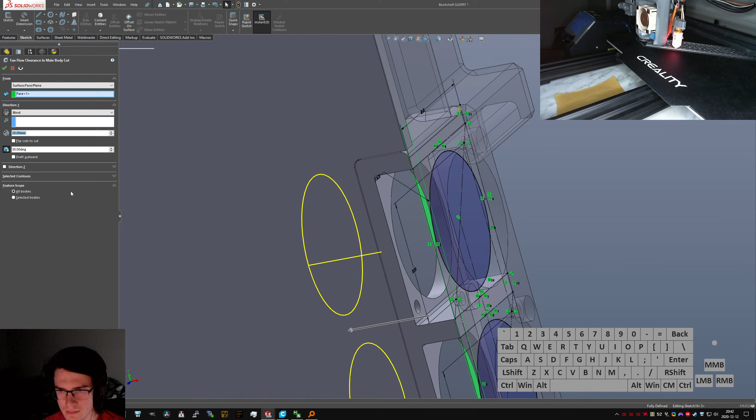That's kind of subpar though. I am going to expand this to cut a little bit into there as well. Hang on, that's not... Oh, that is the last feature. Oh, it only cuts one direction. Whoops. Okay, direction 2. Where did I cut it from? Oh, I cut it on that face. So I can just do...

Oh, this will be so pretty. I can just do like a 10-degree draft, which is way less steep. And I can do up to surface. Up to right there. And then I get a nice gradual, a little bit more lead in. And I get lead in that I can control too. If my printer wasn't moving around doing things right now, I would check what that diameter is. 38. And this is 37.55. I think I'm gonna open it up just a little bit more.

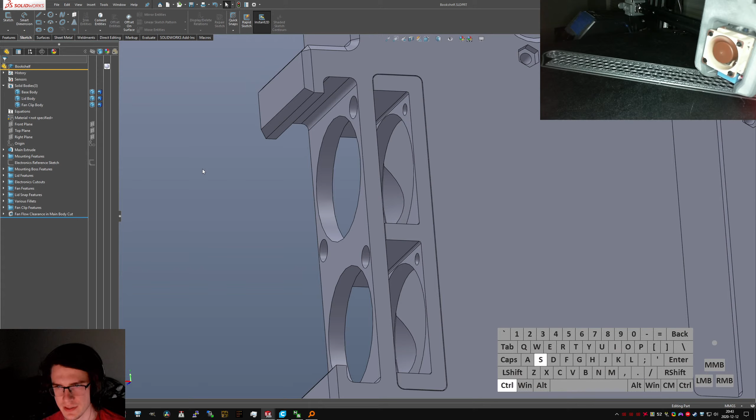I'm surprised it's not showing me. Oh, there we go. I don't know why that's over there. If it's 15, I come back here. Oh, that just looks great. Let's, hang on. I think if I undo the transparency in here, we can then look at, I want to pick this fan. I want to pick your right plane.

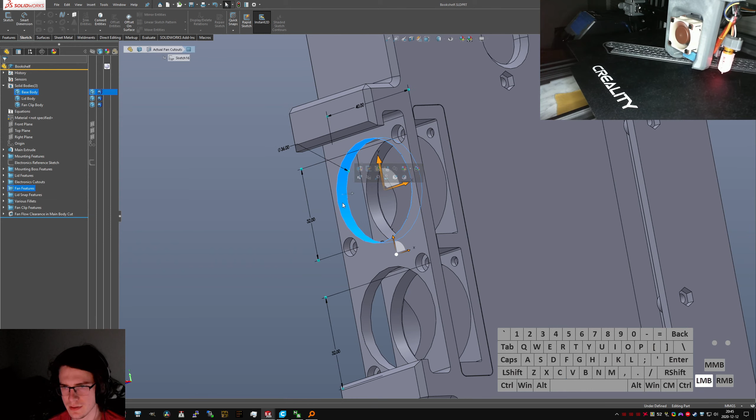Do I want to draft those a little bit? Let's make them like 38. It's like 1 millimeter bigger on the diameter. That's starting to kind of push it. Whoops, that's 0.7, not 37. 37, okay. I think I'll just add a little bit of outward draft. Draft outward 10 degrees.

That comes out to, what? Oh. No, okay. Oh, hang on, no, I can swing that. Yeah, okay, I know what I can do. We can... This will be 38, which will bring us right up on the edge of, like, touching those. But then, we add the 15-degree chamfer back in, so it tightens up on this side.

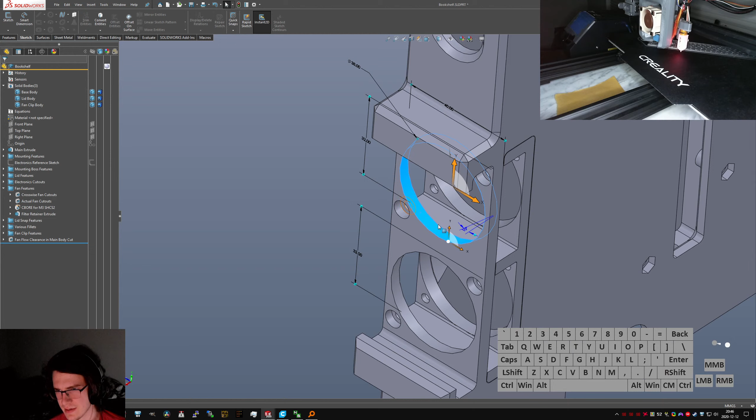Oh, that's not great. That shouldn't do that. Hang on. This is going to be 10 degrees now, so we don't touch those. And we'll slacken that a little bit. Or, no, we can keep it steep, because we're doing that for clearance on that side. So we'll come look at the top again. And we're a little too steep on that.

Oh, I see what I've gone and done. Gone and pulled an idiot. Because I'm changing which side I'm cutting from. So if I... One of these cuts here doesn't actually need any chamfer because it's going to match the inside of that one. So if I get rid of chamfer there, which I think would just put it at the diameter, so I can even get rid of that whole direction. And it won't adjust that face at all, which is good. Shortens the rebuild time just a hair.

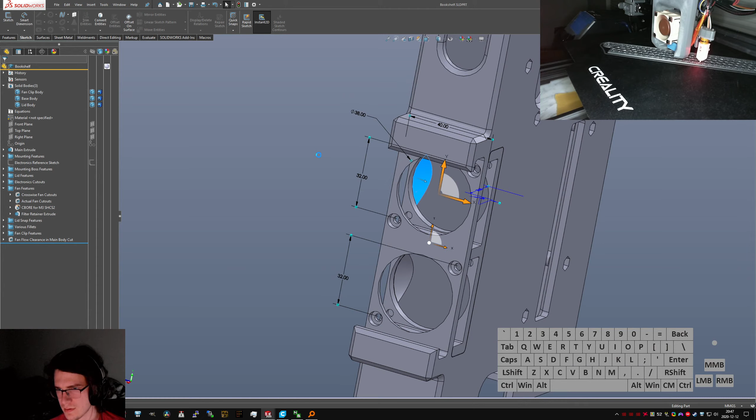I think if I want to be really clever, I could add some sort of, what's the word for it? Like a little nose cone, or it wouldn't be a nose cone, it'd be a butt cone or a tail cone or something, because it's on the back end, because the flow is going this way, and maybe cones of some kind would help it, but I honestly don't think it's really necessary. Plus, it'd be a huge pain to model. So, as we all know, that is the #1 factor. Is it a pain to model? Cool. Yeah, don't do it.

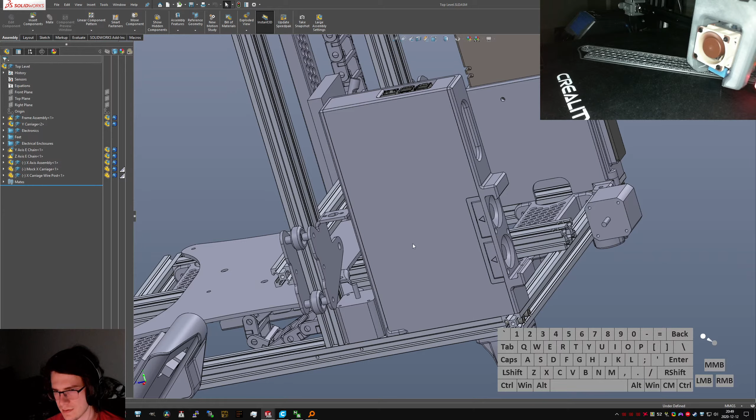Let's get rid of that. And hide that for a sec. That is shaping up to be super duper sweet. And I think it's probably good enough to just print now. Unfortunately, as you can see up here in the upper right of my screen, I have something already printing, so alas.

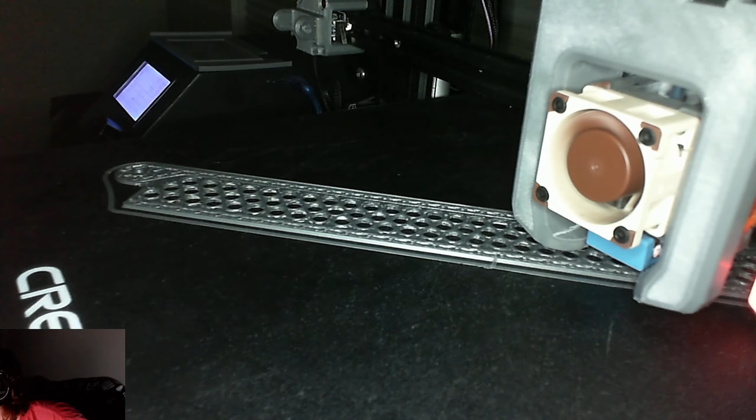Yeah, wow. That's supposed to provide full coverage, and if we go look at the camera, it's hard to make it out, but it's just not printing all the way to the edges. So I need to kill this print, honestly. So that's what we're gonna do. Control. Oh, here we go. Hide connection. Cancel. Which is disappointing because this is an hour and a half into an 8-hour print, but more disappointing would be having a part that doesn't work at the end of it.

So we're gonna come up in Z. It's home. And then get ourselves out of the way. Question is, do I want to print this next? Because this is kind of more, I mean, they're all critical. I have to have all the components before I can reassemble the thing in a different shell.

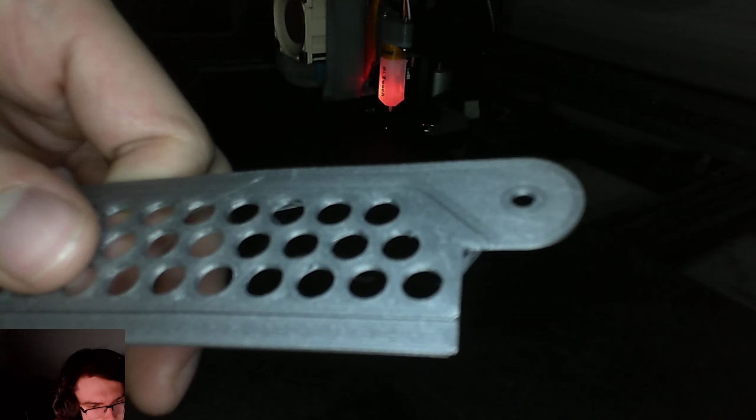Scrap it to multiple. Oh yeah. Oh, hang on, that's... Okay, no, that is still bad. I think it's supposed to be support. Yeah. So you can see that there's those two separate layers, and if you look edgewise on it, you can kind of make out that there's supposed to be a little bit of separation there. We'll bring it back to the main monitor now. Come and look at G-code. We have this sort of support layer underneath.

I should hide travels and do by line type. So we've got the support layer underneath here. That looked like crap, and this layer looked like crap. So it's just really not even worth saving. The whole thing crimples in your hand because it's so thin, but it should be a little sturdier than this at this stage of the print. So nuts to that. I guess the next question is, how far can I rotate this guy?

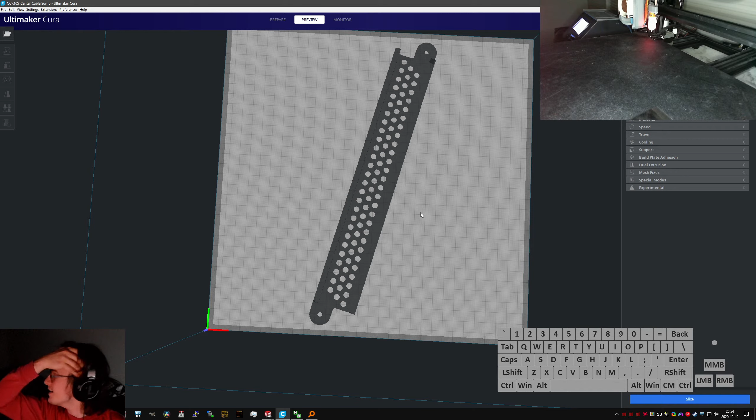That's pretty far over. I think we'll be able to print a whole bunch of... No. Done that before. Every time I try to print multiple things, it fails. Really have to do one at a time with this printer, which is a little unfortunate. But, what are you gonna do? It's not a level bed, so... I think we'll just reslice this and start that and call that the end of the day.

Hmm. Actually, no, hang on. I do want it at this angle if it's going to be fingerprinting. The closer you are to the fringes, the messier things get. It just doesn't adhere as well.

That's interesting. There's kind of some spots where, like, there's sort of a masking effect going on here. But sometimes when they overlap, it unmasks it. Weird. I don't know. It wouldn't surprise me if the graphics code in Cura was just a hot mess. Looks good. Delicious Schwarz D pattern doing very well for itself.

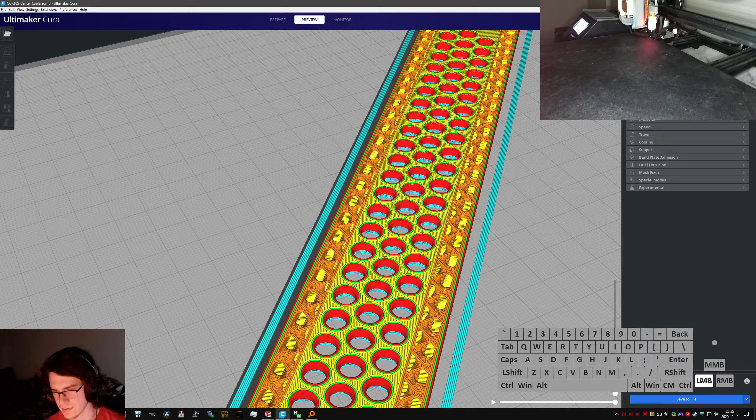Ooh, that's not great. Okay, hang on. We do want this back this way, or at least a little bit offset. So the problem, I'll isolate the layer so that you can see exactly what went wrong, but because Schwarz D naturally has, well, it's got 45 and 135 degree sort of clears, or tubes through it, I guess. Places where there's no support and it only runs in one direction.

Which works great if you have big rectangular parts that you're printing square to the bed, but when you're printing sort of long skinny ones like this, it can give you locations where you have really big voids that run the whole length of your part and cause significant weakness, which is terrible. So once this finishes slicing, isolate. So the problem that happened was these voids that all run this way were aligned with the part in the previous iteration, but now they'll connect pretty sturdily, so I'm not really worried anymore.

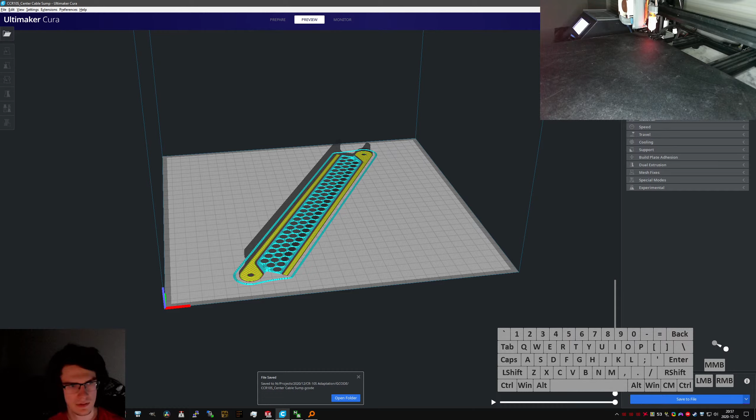We're going to save this guy, center cable sump, switch back to the Octoprint window. Main cable sump, no, center cable sump. Back into printer components. Arc Welder, fantastic plugin if your printer firmware supports G2, G3. Absolutely worth getting. Look at this. It's compressed the file 3 times. It's fantastic. Hands down one of the best Octoprint plugins, I think.

Okay, so we got Arc Welder pre-processing, ended up saving us, I don't know, however many gigabytes? Yeah. So, saved 11 megabytes of space. And since I use very curvy infill, that's a really fantastic savings. It's not quite just switching to linear infill, but since I really want to keep the nice isotropic properties of these kind of funky shapes, it's absolutely worth doing.

So, I think we're still warmed up. Yes, we are still warmed up. And we're gonna just send it, I think. I'll leave it up on this for a little bit. Do something. Do something! Give me my temperatures. It's working on it. Oh, it's just trying its darndest. And it overshot. It looks like it's delaying reporting a temperature. Just a little funky. But it only did that while it was heating up. Once it was heated up, then it stopped. A little sketch, but

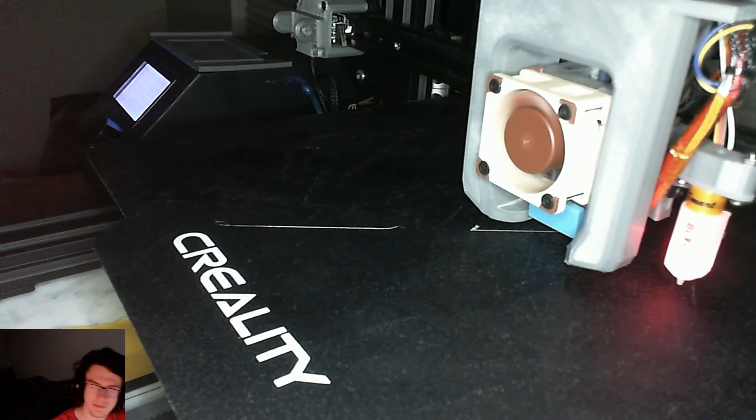it's processing. Oh, that's nice. This must be a new one in 1.5.2, I think. Because normally you get these busy processing messages when you're doing stuff, but now you just get G-code. And I'll switch back to the camera. And away we go. Ignore that little dingleberry right there. It looks fine otherwise, so it's just doing that, I guess.